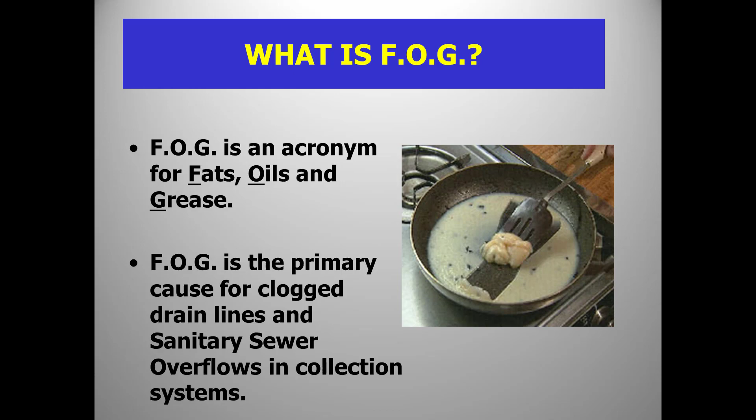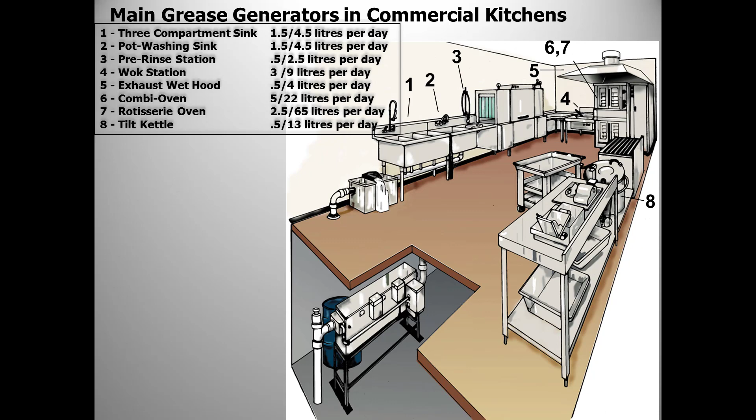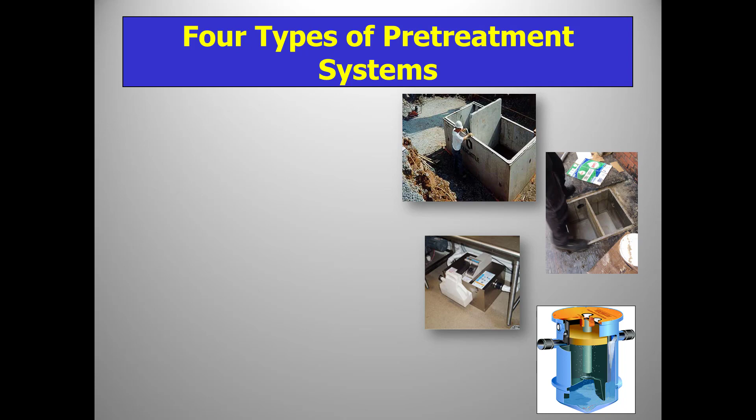So there are 4 different types of pre-treatment systems. The first one is the large precast concrete grease traps.

As you can see, they are basically just large tanks with certain baffles in them.

Then we have the complete opposite: the small hand scooped type grease traps. These tend to be somewhere in the region of 200 litre total liquid volume, but they fill up with grease very quickly and are very seldom maintained properly.

And then there's the grease recovery unit, the GRU, or the automatic grease trap.

And then finally we have the super capacity low volume passive type grease trap, although a TrapZilla in this case is actually a HydroMechanical grease trap. I will come back to this HydroMechanical grease trap later and explain that. But for now, basically a HydroMechanical grease trap, like an automatic grease trap, is a grease trap that's sized by its flow rate rather than the number of meals per day or the size of the pipe feeding it. Like I said, I will revert back to that later on.

So that's the different types of grease traps that are normally around.

In this slide I'm demonstrating your typical conventional grease trap. At the very bottom of the tank you can see sediment build up, or sludge build up. Just below the inlet and outlet level you can see the static level of water in the grease trap, and just below that static level you can see the grease layer, or grease mat.

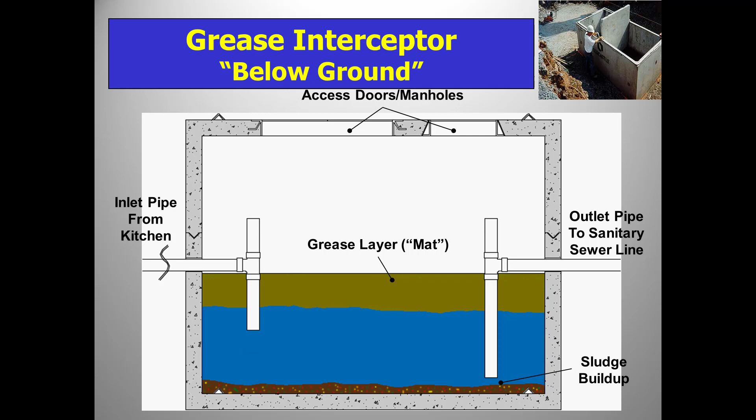You have to be mindful that with the typical conventional grease trap, the sludge and grease mat must never pass 25% of the total capacity of fats, oils and grease in the trap, because once it passes 25%, the efficiency of the conventional passive grease trap starts to degrade seriously. So really, it's only capable of handling approximately 25% of its total liquid volume. Any questions, come back to me.

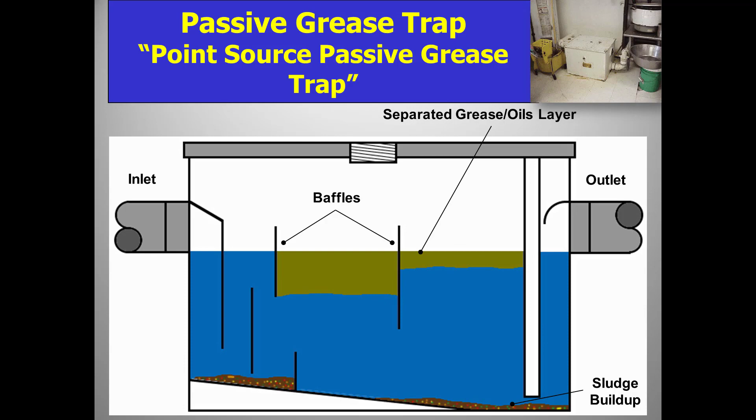This is the small passive type grease trap. You can see in the top right corner a photograph of this type of grease trap. It's a point source passive grease trap with a few different baffles inside it. The main baffle in this case is the one on the outlet side, and there are other baffles inside just for dividing up the flow. But again, it fills up very quickly with grease.

This is the inside of the automatic grease trap. As you can see, it has an internal strainer basket, then a mechanical mechanism for removing the grease. In this particular case, it's a wheel controlled by a timer. Invariably the timer would be set to operate in the middle of the night, somewhere in the region of 3 to 4 a.m.

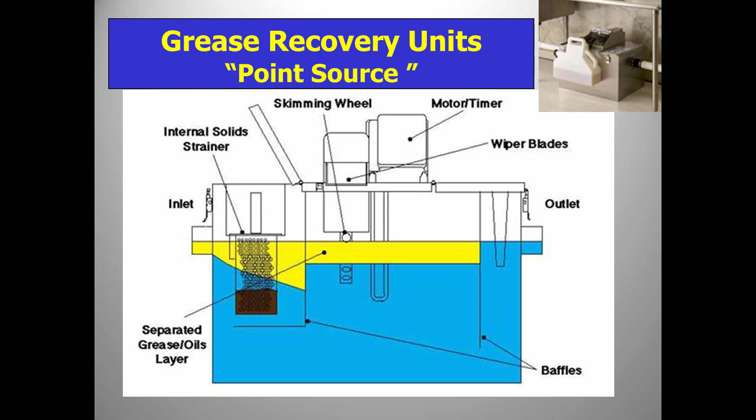Normally the preferred time would be when the kitchen is not in use. So when it comes on, it removes the trapped grease sitting on top of the invert levels of the grease trap, and generally removes about 90% of what it has trapped, leaving the retention tank ready for the next day's production when the kitchen staff come in. So that's basically grease recovery units.

Like I said, the most important thing is that the point source grease trap is the biggest area where automatic grease traps are used. The sizing of the automatic grease traps is all done based on the flow rates. Some of these slides are going to be totally self-explanatory.

So you just have a look at that, pause it and look at it. Again, any questions, just come back to me.

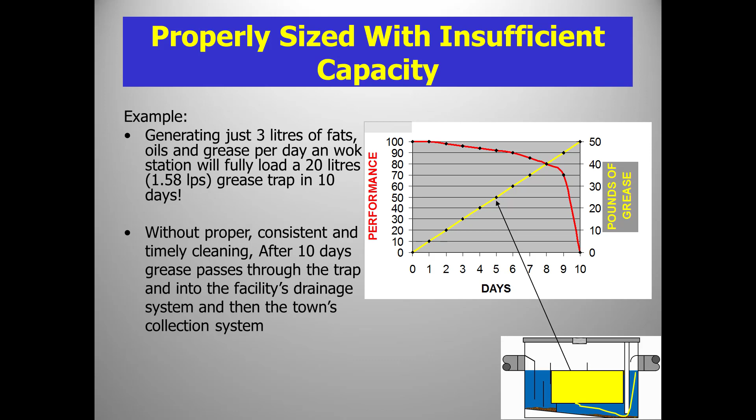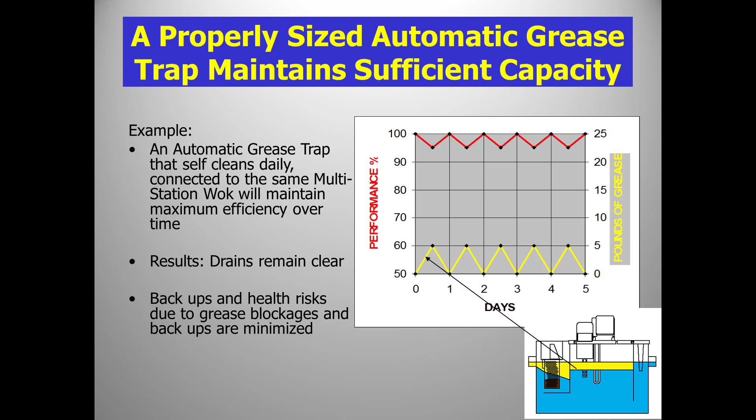Properly sized with capacity - this slide is trying to demonstrate how the retention area in an automatic grease trap is constantly filling up, and then is also being automatically rejuvenated, brought back to an empty, or almost empty, retention tank. You can see in the bottom right side where it's demonstrating that the grease mat is being constantly maintained.

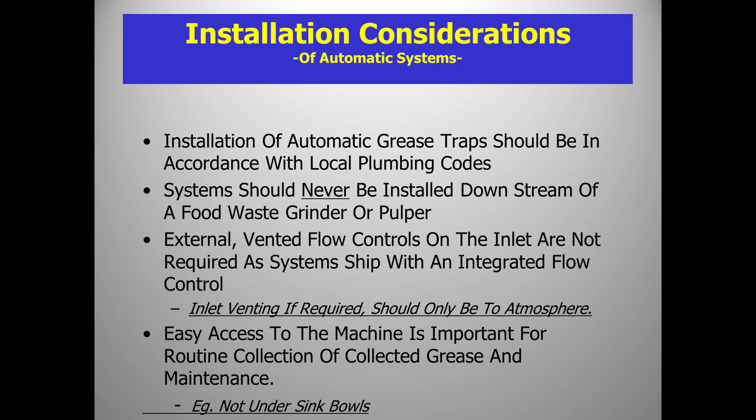Again, all of the installation considerations have to be considered for the different types of systems in that. Again, self-explanatory.

Automatic grease traps, the majority of which are the Big Dipper type, have anti-siphon devices built in. But it's always worth it for an engineer or specifier to specify that units have proper venting, because if a trap isn't properly vented, it can cause what's known as siphoning.

When siphoning occurs, during the hydraulic event of the grease trap draining, the hydraulic pressure on the outlet pipe can cause all of the water to be literally sucked out of the grease trap. Sometimes this is a major problem, as the trap ends up totally empty, which is not good, and it also sucks out the sludge and grease.

Regarding maintenance, automatic grease traps tend to be like spoiled children, in that they need 2 minutes of attention every day and 10 minutes once a week. If they don't get it, they tend to kick up blue murder, so it's really important that the maintenance program is adhered to.

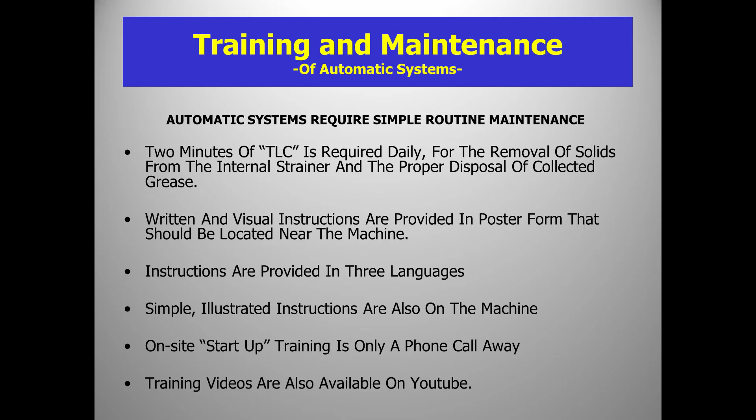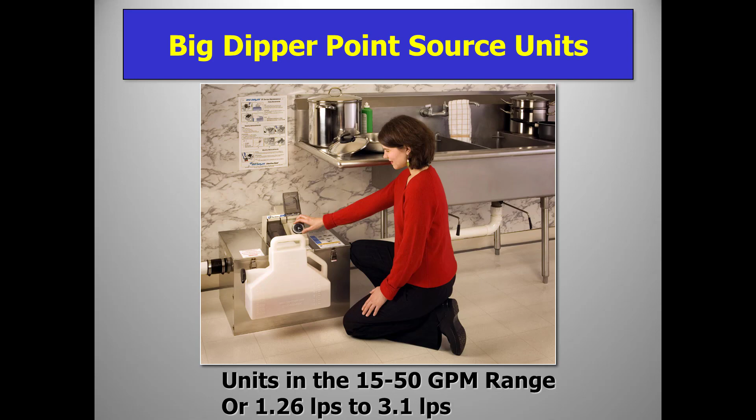The flow rates with our Big Dipper units tend to range from 1.26 litres per second up to 3 litres per second. That's typical for commercial kitchens. We do have bigger units, but come back to me if you have any questions on those.

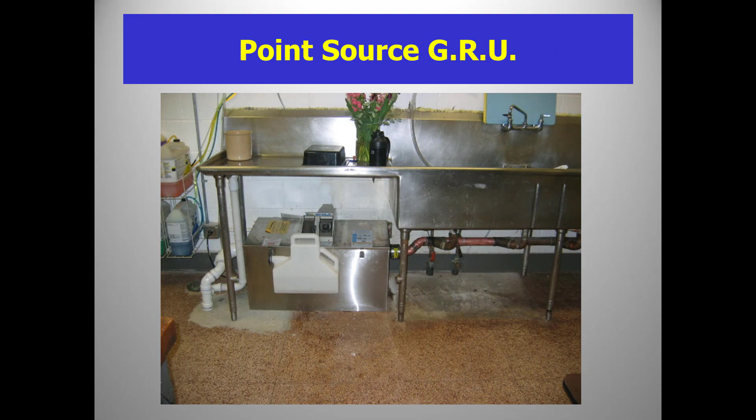These are just self-explanatory. Now, understanding kitchen flows.

This is your typical fast food type restaurant. With fast food, you tend to have a 3-tub sink, which is 90+% of the kitchen's total fats, oils and grease, and then there's another breakdown for the mop sink and floor drains. They tend not to have dishwashers.

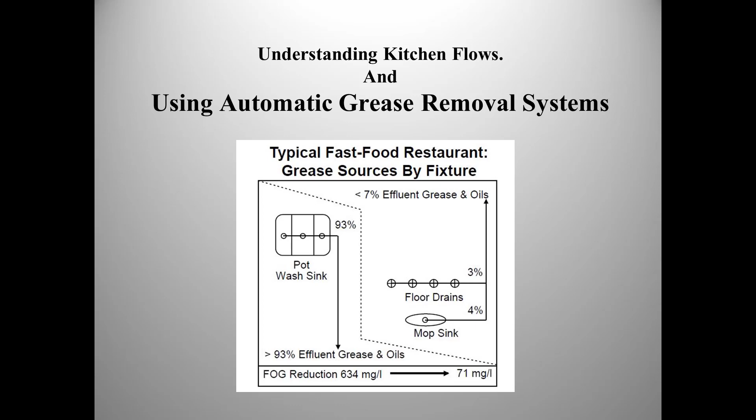Typical full service restaurant: you have a pot wash sink, generally responsible for 75% of the kitchen's fats, oils and grease. Pre-rinse sink is 15%, dishwasher 4%, and so on.

But the most important thing I want to get across with this slide is that when you have a dishwasher and a pre-rinse sink, it is not necessary to have the dishwasher drain into the automatic grease trap if the dishes are pre-rinsed before they go into the dishwasher.

The main reason is that if you allow a dishwasher to drain into an automatic unit that's already trapping the effluent discharge from the pot wash sink and pre-rinse sink, where grease is sitting in there, the dishwasher discharge comes in at anywhere between 60 and 80 degrees Celsius, plus it has a very high detergent content. When that comes in and mixes with the grease already trapped in the retention tank and swirls around, it literally robs the grease that the grease trap has already trapped and takes it down the drain.

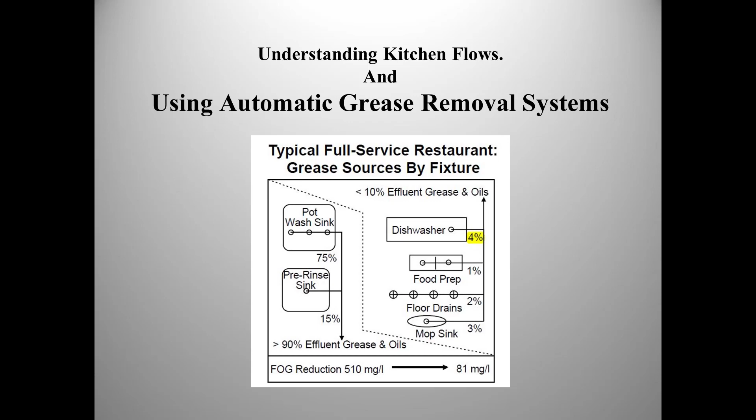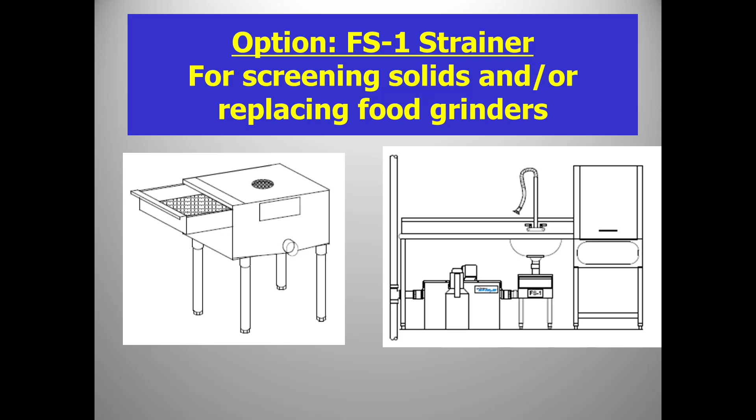The Achilles heel to any grease trap, no matter who manufactures it, is food solids. I would always encourage engineers and specifiers to specify as much trapping of food solids as possible. In this slide here, it's just one type of strainer, so it's just a system for trapping food solids. There are many out there on the market, but this is just one. Anyway, do your best to trap as much food solids as possible.

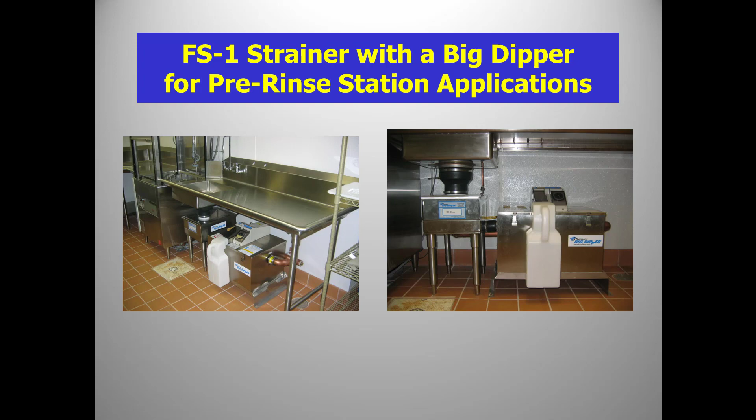And this is just a couple of photographs here showing different setups of food solids.

Okay, so moving to the central units, i.e. the big dippers that go down in basements. One particular site that comes to mind is Terminal 2 in Dublin Airport. It has 4 units like this that are underneath the food courts. Although all the food courts have their own grease trapping solutions, this is just something that the airport authority decided they wanted to have in there as a backup to what was going on in the food courts. They have 4 of them, 2 on air side and 2 on land side.

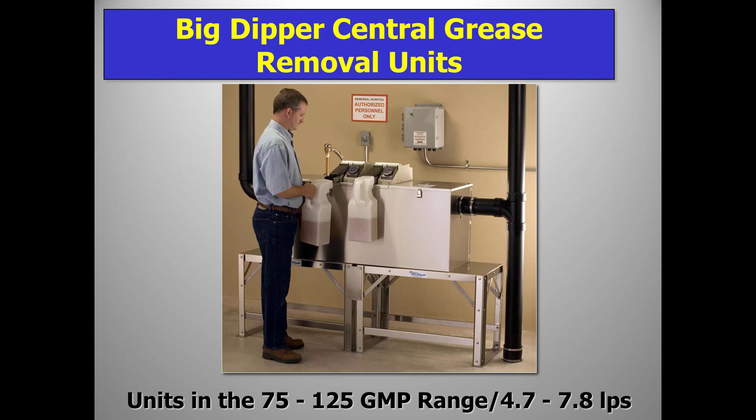When you put an automatic grease trap in a remote location, i.e. a location that's away from the kitchen, that's out of sight and out of mind, you need to have a system in place that can deal with any food solids that come down to it automatically, if possible.

So in this particular case, we have a Big Dipper AST, which stands for Automatic Solids Transfer. Basically what happens with this unit is it traps the grease in the first chamber on the left hand side of the slide, and every 2 hours a timer activates and opens up a solids transfer system, which basically sucks out the solids of the first chamber and takes it past the grease trap and directly down the drain.

Because you cannot depend on staff, no matter how much they promise you, it will not happen, to come down and empty a strainer basket. They will not do it. When it's out of sight, it's totally out of mind. So again, any questions on this, come back to me.

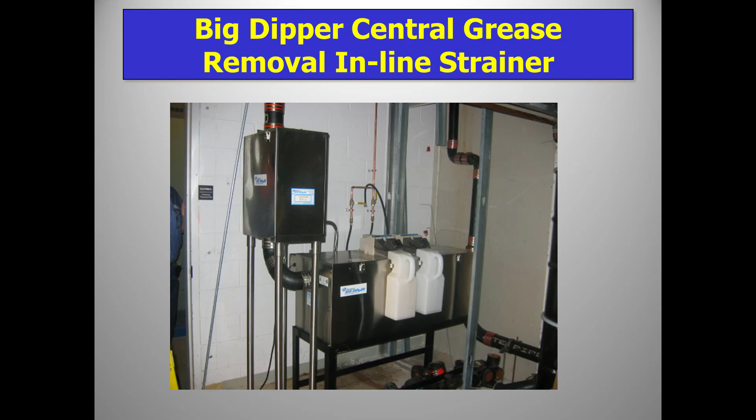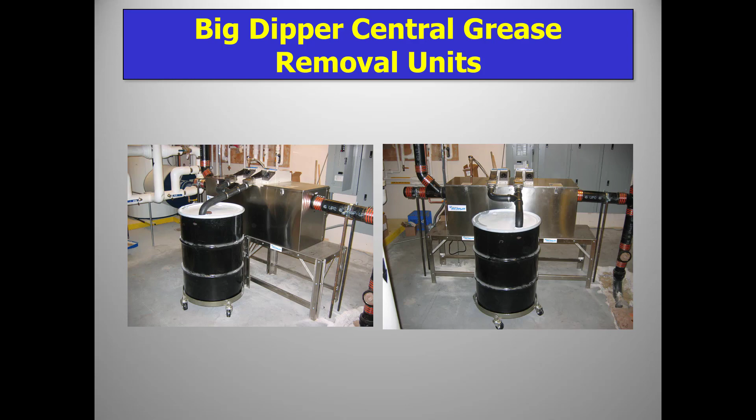This is another central unit, and it has a solids trapping system in there. When you put large units down in basements, it's really best that you put large 200 plus litre grease collectors onto the systems for the collected grease, because you cannot depend on kitchen staff to come down and empty the small 7 litre containers on a daily basis. There are just so many different scenarios, or types of installations, that you can build up.

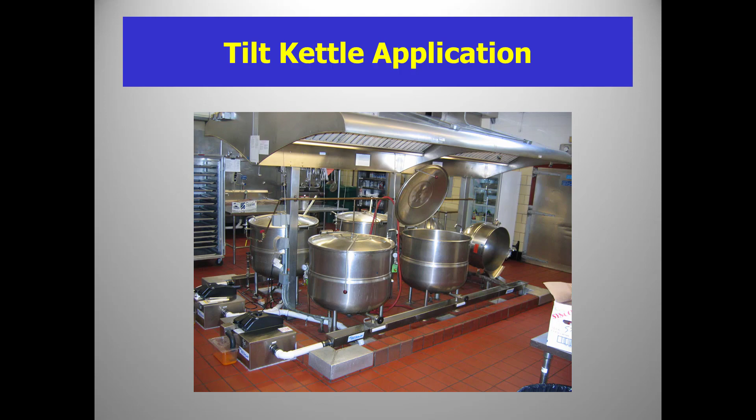Alright, with this system here, it was not possible to put in a grease trap in the basement, so with these tilt kettles here, we put in this trough system to drain into small automatic grease traps, and that's just what's happening here.

That is the calculation required by many local authorities. You can note it down and put it into an Excel spreadsheet if you wanted to calculate, but at the end of the day you need to come up with an answer in litres per second. So that 0.49 litres per second, you just add the different units to it and come out with your total flow rate.

In this particular sink, you can see it has the measurements on the left hand side. So if all else fails, just contact us, number below or email.

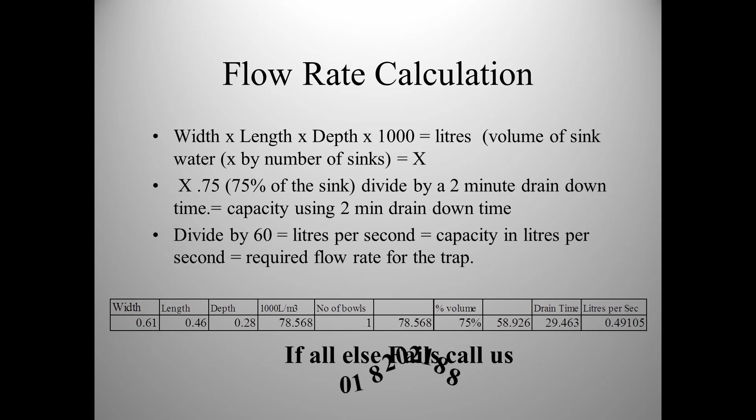Okay, I'm going to move on to the TrapZilla, which is a super capacity, low volume, passive type grease trap. I say passive in that it's a below ground grease trap, but it's actually a HydroMechanical grease trap, sized on flow rate as opposed to the old fashioned number of meals per day. So these are some of the different volumes or different models.

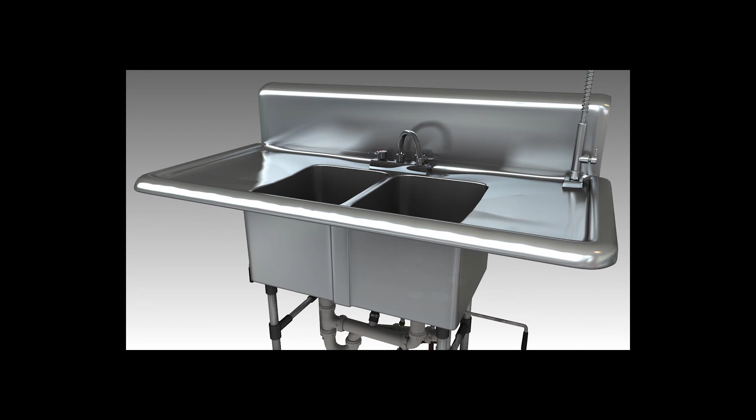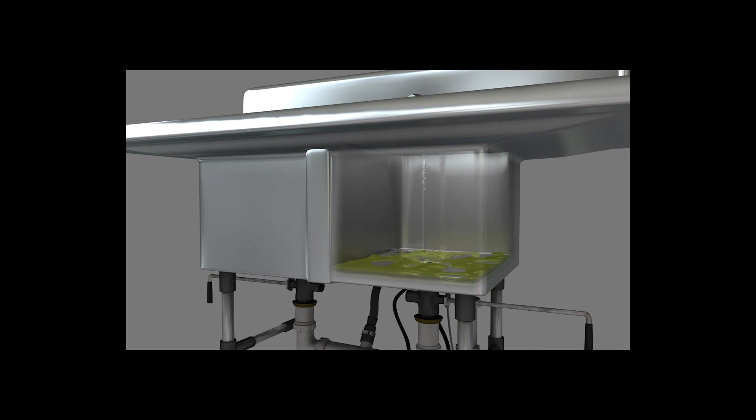Thermaco's TrapZilla Grease Interceptor efficiently treats fats, oils, and grease from kitchen wastewater. Kitchen flows associated with grease often come in two forms. Low flow discharge from a pre-rinse or unstopped sink, where flow rates rarely exceed 5 gallons per minute, and impounded flows, where sinks are filled and then dumped all at once, resulting in much higher flow rates. Low flow discharge is never a problem for grease interceptors, as fats, oils, and grease separate easily at these flow rates. Impounded water flows, despite their higher flow rates, are already stratified, with most of the grease floating on top of the water. With an impounded source, once a flow event begins, the stratified contents of the sink begin to drain, with the water leaving first.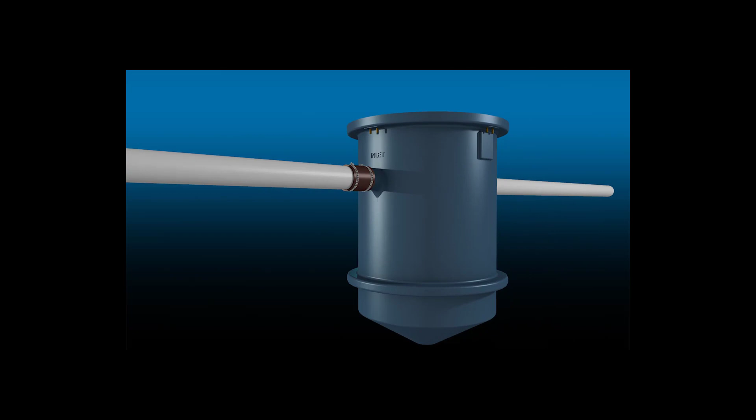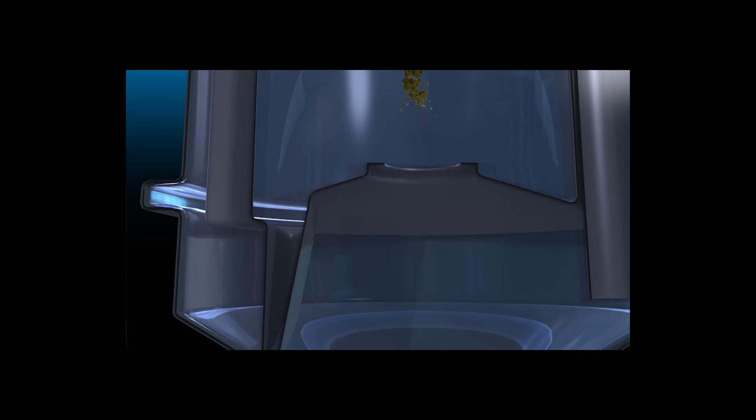Any grease residue from the previous flow event enters TrapZilla and separates, floating up past the horizontal baffle and into the grease retention area. The free-floating grease is the last thing to leave the sink. It enters TrapZilla, floating up past the horizontal baffle and into the grease retention area, where it remains until the interceptor is pumped. The vertical baffle breaks the flow of water into the unit, disrupting its path and preventing water from jet streaming out of the unit. TrapZilla's horizontal baffle prevents this water from interacting with the grease mat, retaining all previously separated grease.

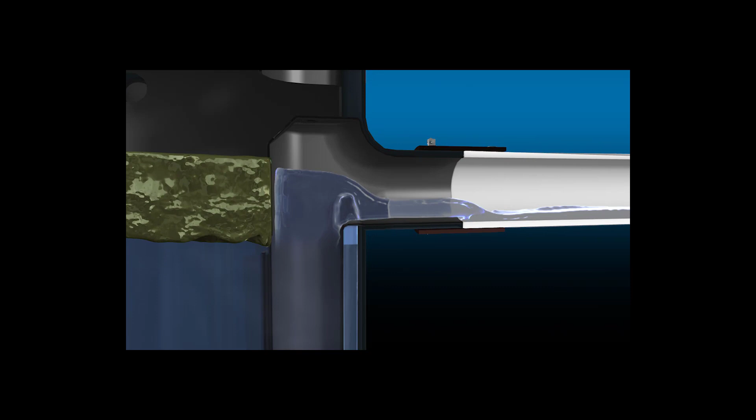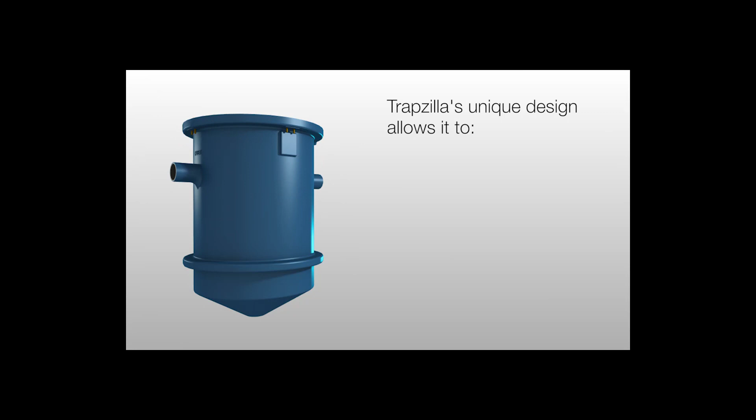As water and grease flow into the interceptor, the liquid level in the main tank rises. Once the liquid level rises sufficiently, clean water from the bottom of the tank exits through the outlet pipe. As the incoming flow slows to a stop, a small grease residue is left in the inlet of the unit. Here it will stay until another flow event, and the cycle will repeat. TrapZilla's unique design allows it to hold large amounts of grease in a compact footprint, retain previously separated grease, and efficiently separate new greasy kitchen effluent, regardless of flow type. The TrapZilla Grease Interceptor, a Thermaco technology.

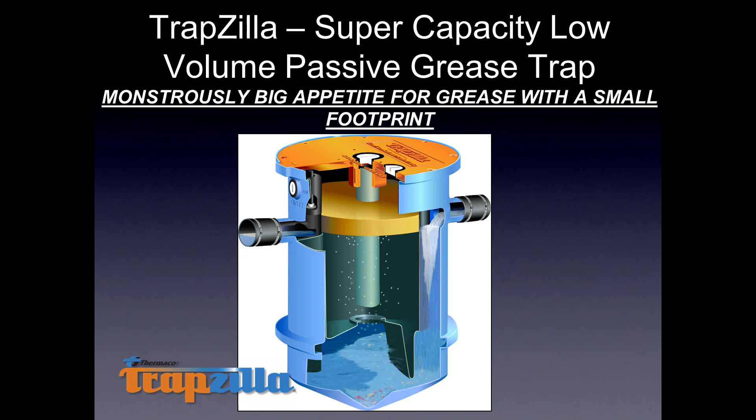This is the TrapZilla Model TZ600, with a capacity of holding approximately 600 pounds of grease, about 270 kilos of fats, oils and grease. It can hold 80 to 90% of its total liquid capacity in volume of fats, oils and grease, as opposed to the 25% that a conventional passive type grease trap can hold. So there's a huge saving for the customer, because when they have this unit pumped out, they're pumping out mostly fats, oils and grease.

Whereas, let's say for example if it's a 1500 litre grease trap, this unit here can basically do the same job, if not a better job, than a 1500 litre conventional grease trap, with a very small footprint. As I've said before, it's much like the TARDIS, in that it is tiny on the outside but huge on the inside. The footprint this unit takes up is really very small, yet it will actually trap more grease than a 1500 litre grease trap, and the total volume on this grease trap is only 360 litres. So a 360 litre grease trap is going to do a better job than a conventional 1500 litre grease trap. Huge saving for customers on their pump outs, as they're now required to have pump outs done on a regular basis, at very least every quarter, every 3 months.

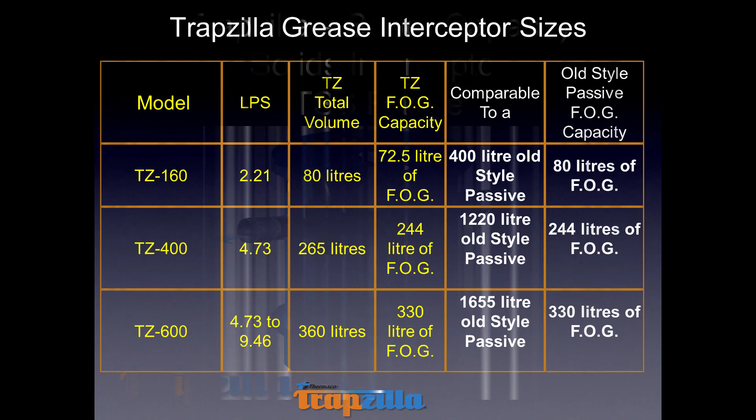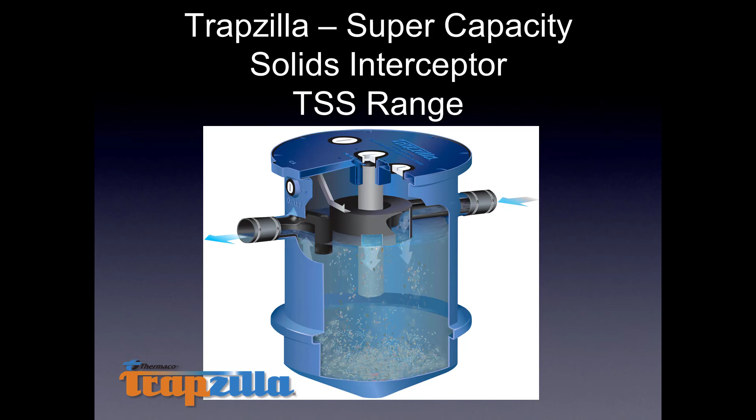This is the TrapZilla Solids Interceptor. Again, it's the very same size as the TZ600, but as I've said before, food solids are an Achilles heel to every type of grease trap out there. So whenever possible, you need to specify that the customer deals with the food solids. And that's basically what this is, a food solids separator.

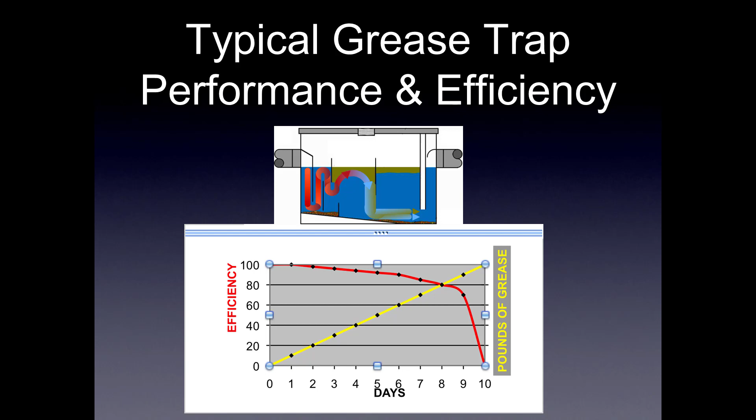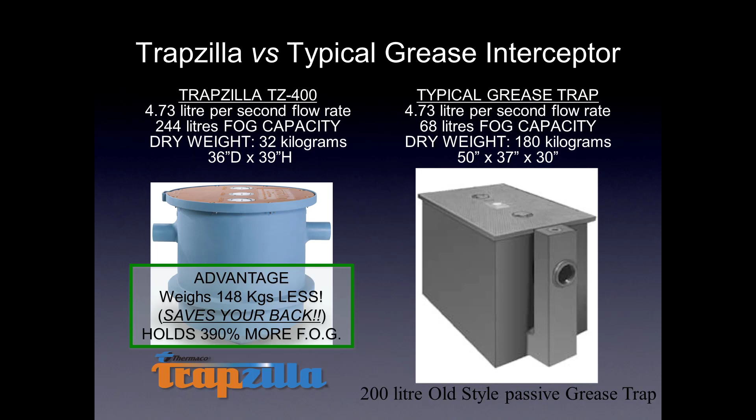Dell Ireland contacted us as they had a problem with their conventional below ground 1500 litre steel in-ground grease trap. The steel was rotten and it was causing the trap to leak into the ground around the grease trap, causing many problems.

Basically, we went at the inside of it with an angle grinder, tore out all the old baffles and put in a TrapZilla TZ 600. The TrapZilla TZ 600 has a capacity of approximately 330 litres, and it will actually trap more grease than the 1500 litre grease trap that it is replacing. Dell Ireland have been very happy with this installation.

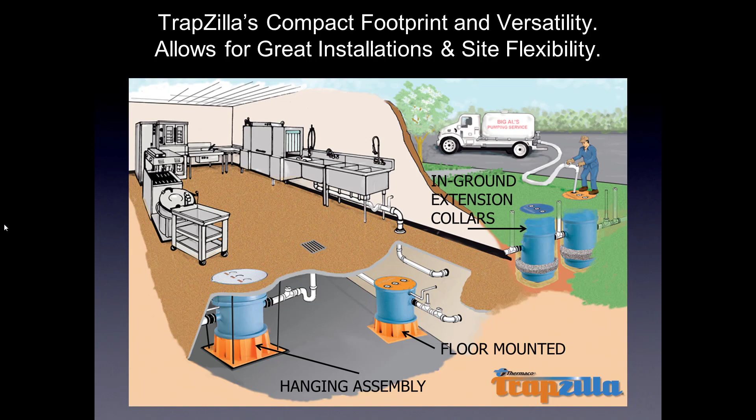Okay, basically with this slide it's self-explanatory. It's just the different types of installations: suspended from the ceiling, on the floor of a basement, or outside and below ground. Again, with all these installations it's so important to make sure that the traps are vented properly and there's plenty of cleaning eyes put in.

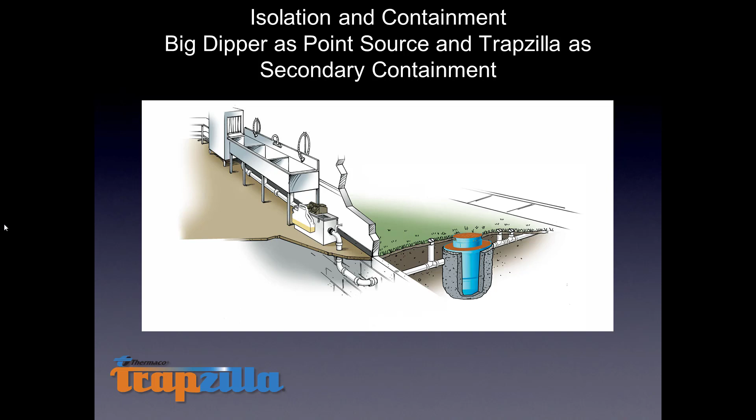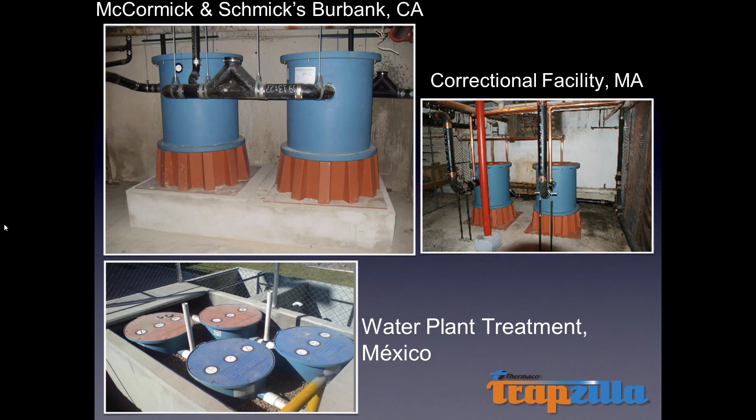In this particular case the TrapZilla is going in as a backup to the automatic grease trap that's inside the kitchen. Again, in these slides here it's just some samples of our installations.

With this slide here, when the TrapZilla was originally installed, it was not fitted with a vessel vent, and the staff in the laundry room here were complaining about odour coming from it. So again, I just need to emphasize the importance of venting properly, and if there's any queries at all, just contact me and I will talk you through the different venting that's required.

You can see here we have solids interceptors in front of the TrapZillas. With these TrapZilla arrays, as I call them, you can put in as many as you like, you can just keep adding. The largest one I know is in Fort Bragg in North Carolina. It has 2 solids interceptors and 10 TrapZillas after it.

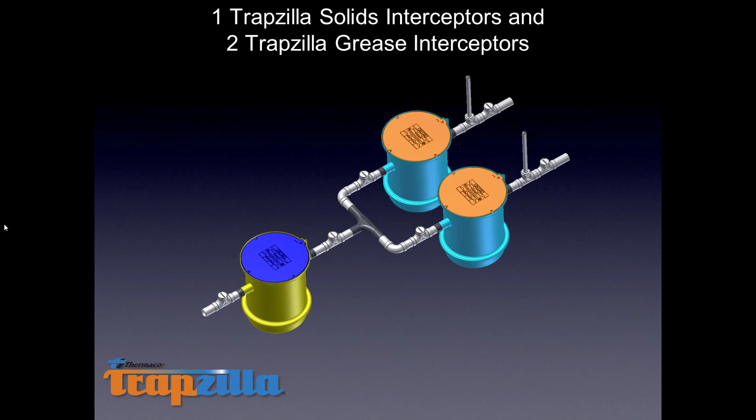They were originally instructed by the local authority to put in a conventional below ground grease trap that was similar in size to an Olympic sized swimming pool. Seriously, and they were allowed to put in the 10 TrapZillas instead, which saved them a fortune. Anyhow, again, these are just different types of installations. I'd like to draw your attention to the cleaning eyes and the venting that's in here in these.

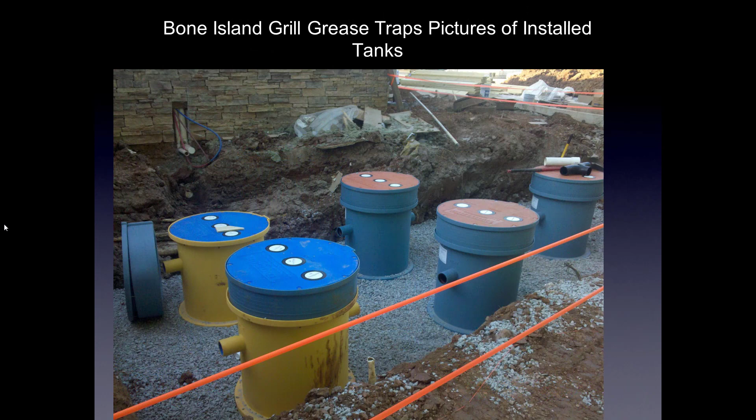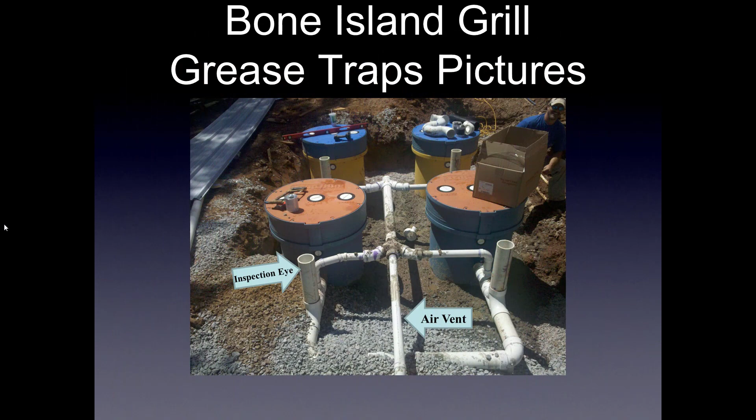The TrapZilla is made of polyethylene, and in the majority of cases it will outlast the building that it's going into. Here in this particular case, it was a 1,000 litre grease trap, and we put in the TrapZilla TZ 600 model.

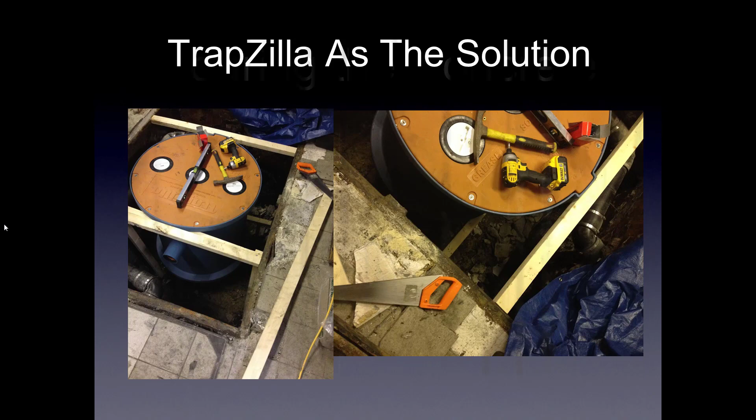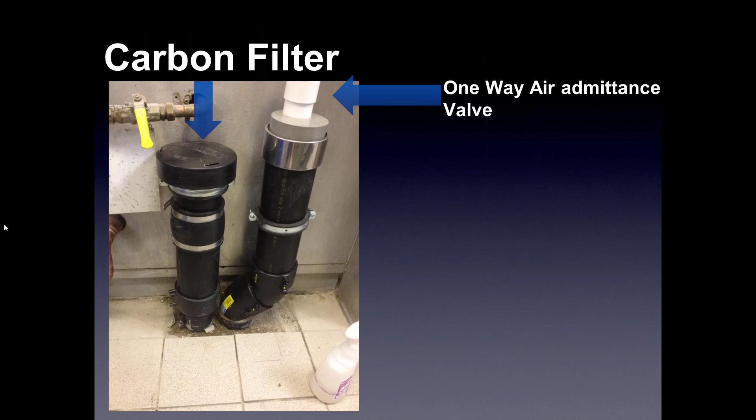Again, here in this slide, we're showing that the TrapZilla has two vents. One is the hydraulic vent, air admittance valve, that goes on the outlet, and on the left hand side you can see the carbon filter, which is the vessel vent, and this allows the unit to breathe. If the vessel vent is not fitted, then the TrapZilla will breathe through very small perforated holes on the lid. It will have to breathe as water goes up and down, a bit like a cylinder in a piston engine. As it goes up and down, it needs to move air. This was the first pump out that took place of this grease trap one month after installation.

Thermaco dates back to 1983, and we got involved in grease separators in 1985. In many cities, downtown areas, they had no room for the conventional type large concrete or metal grease traps to go, and they wanted more capacity. And that's when we brought out the TrapZilla.

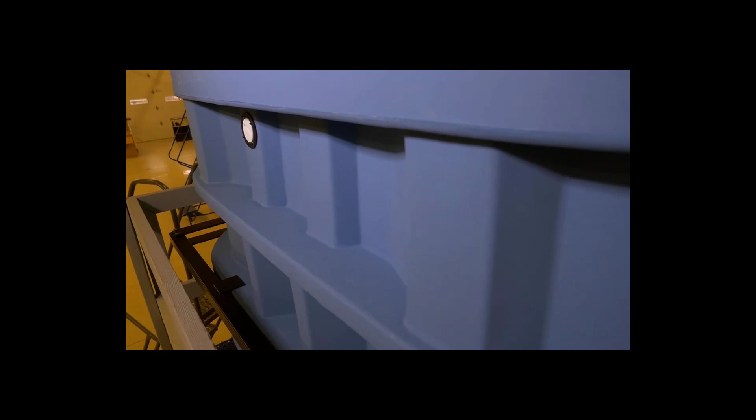Since 2006, we have been perfecting the TrapZilla design. Today's unit that's being evaluated is the pinnacle. We refer to this as our 3rd generation TrapZilla design. It uses the hallmarks of the horizontal baffle, with a number of subtle treatments on the inlet and outlet baffle, and the overall tank design has been optimized to enhance separation and to have as much grease retention in as small a footprint as possible.

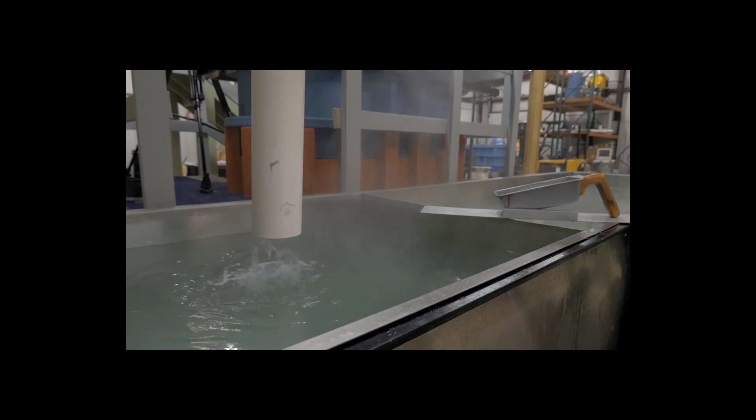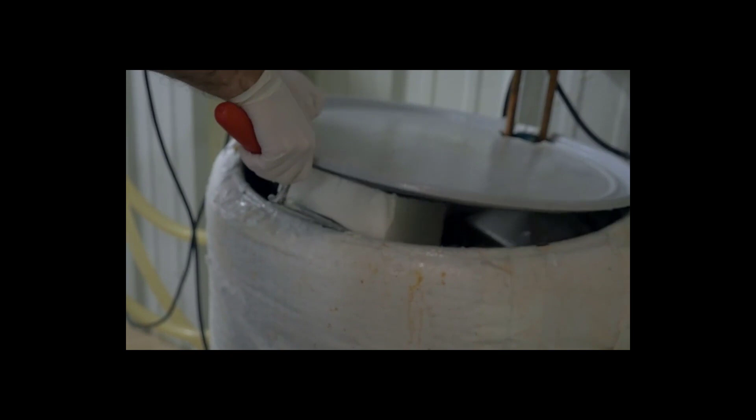Today's test is a rather strenuous test in that it's 100 gallons per minute, using 160-degree hot water, and 20 pounds of grease, lard, at a time being administered in 200 gallons of water, batch after batch. This is far more strenuous than would be seen in any restaurant.

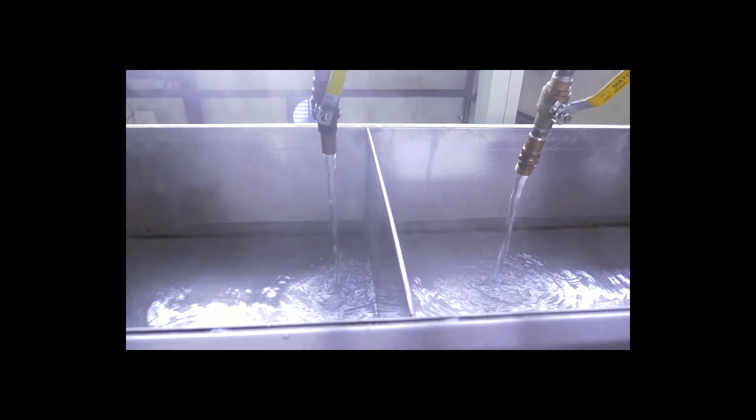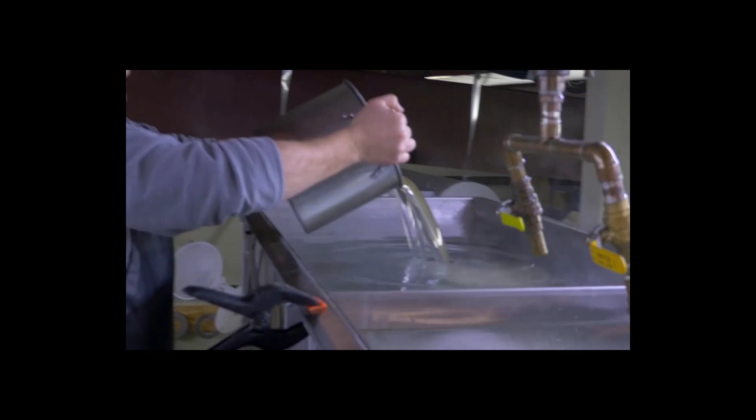Here are 2 stainless steel sinks, and they each hold 100 gallons of fluid. We will fill them up with water at 150 to 160 degrees F. After the water fills up the sink, we will also add lard. The lard is also preheated to the same 150 to 160 degrees F as the water, and because the sink partition is in here, we will add 10 pounds of grease here, 10 pounds of greased lard over here, and drop them in over about a 2-minute period of time.

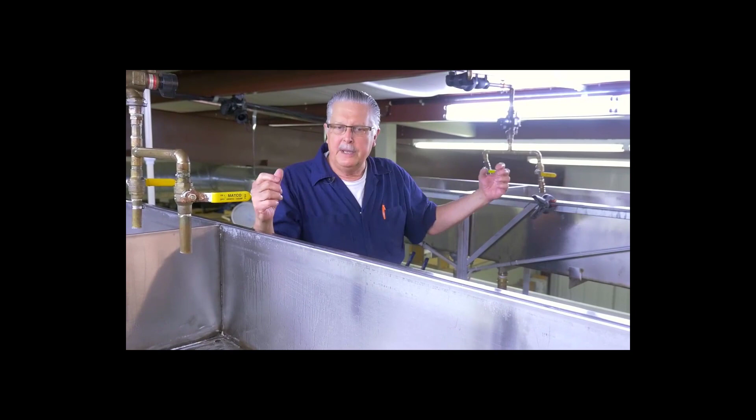Total of 200 gallons, dropping in 2 minutes time gives us 100 gallons a minute, and that's the flow rate for the unit we're evaluating. During the test, all the water and some small amount of grease passes through the unit and goes into the skim tank. In order to determine what is retained in the unit, we have to determine what is not retained in the unit, and that's where skimming comes into play.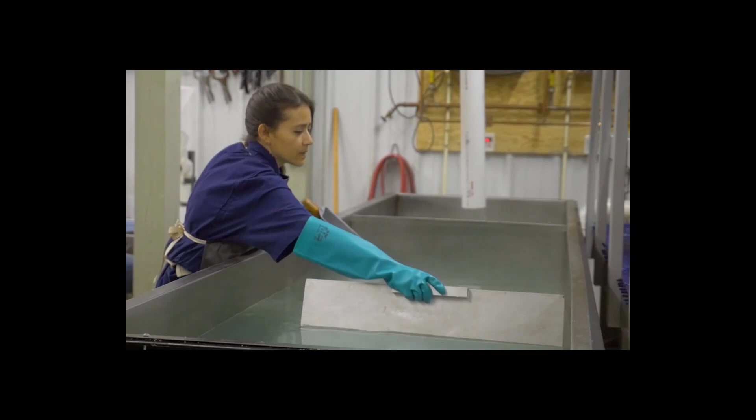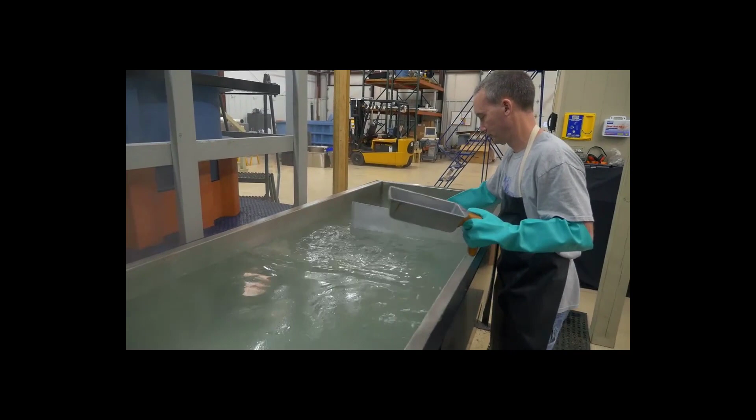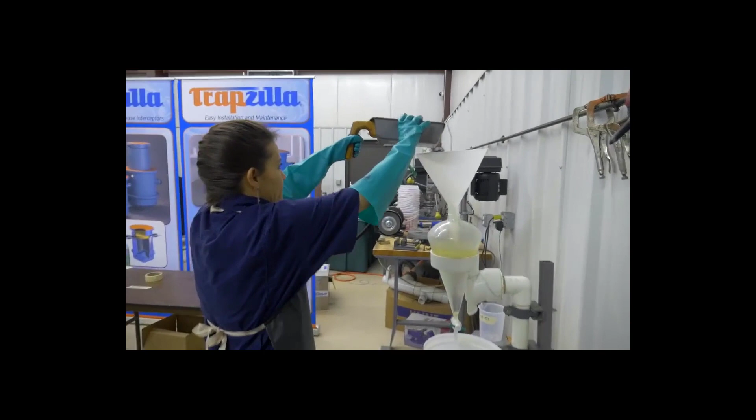The lower specific gravity grease rises to the top of the skim tank, and we use a long blade to corral any grease that has risen to the top over to a corner. We use a small pan to remove that material from one end of the tank. Pour that material into a separatory funnel where it further separates. We'll get a little bit more water out of it there, and then we pour it into a beaker and

weigh it. And that gives us a weight for each drop cycle, a weight of the amount of the grease that goes through the unit. That gives us what it didn't hold, and we know what we put in to begin with, so the difference of those two gives you the amount of material that's held inside of the unit.

Now the weather. We're expecting an enormous amount of snow tonight.

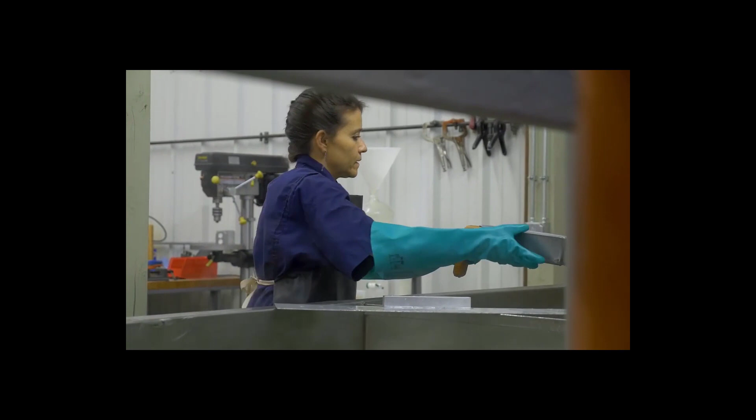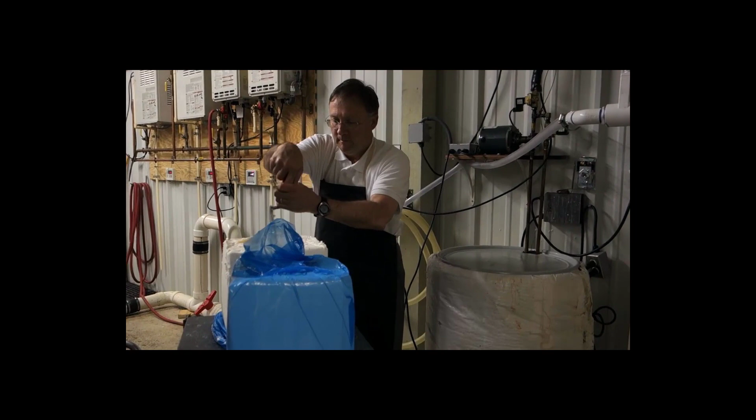We found out there was a winter storm rolling in on Wednesday evening, and we thought about the safety and the ability of our employees to get in. Because of that, we decided to start testing early on Tuesday evening. I plan to be in the building, staying here, finishing the test, and have no idea if I'm going to get home tomorrow night because the roads may be totally impassable in our town.

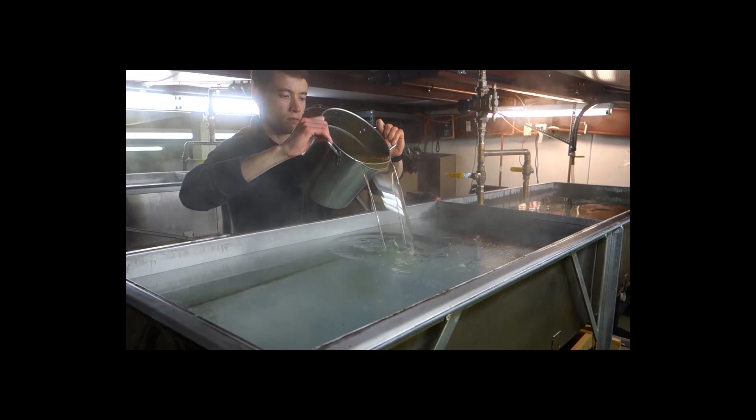We've determined that the TrapZilla model we're testing has passed the theoretical limit of a 750-gallon Interceptor, which is 1,381 pounds of grease retained. We did it. I think with that last drop, number 76 in this case, we have passed the 1,500-pound mark. Pretty awesome accomplishment.

Right now at the conditions on Highway 64 between Asheboro and Lexington, you can see a good amount of snow cover on the ground right now in this area. Check on the outside and see how the snow's doing.

We just had drop 92. About 6:35 in the morning. We've been going for almost 40 hours straight of testing. 92 successful drops. 92 flat separation curve drops. That's right. Averaging what, 99? 99.3% cumulative efficiency. I'd say this today was a huge success, completely exceeding our expectations. It did.

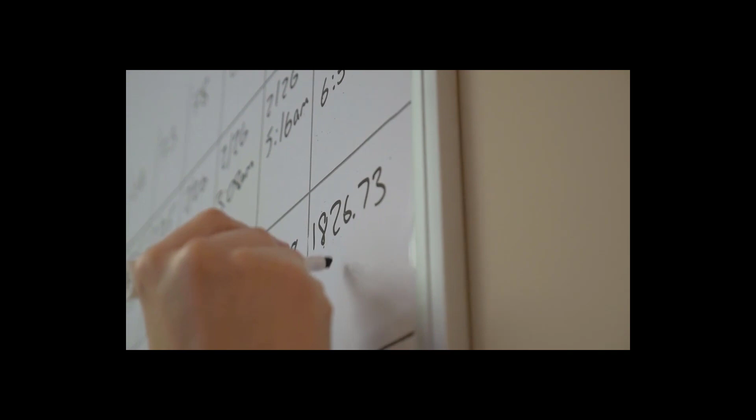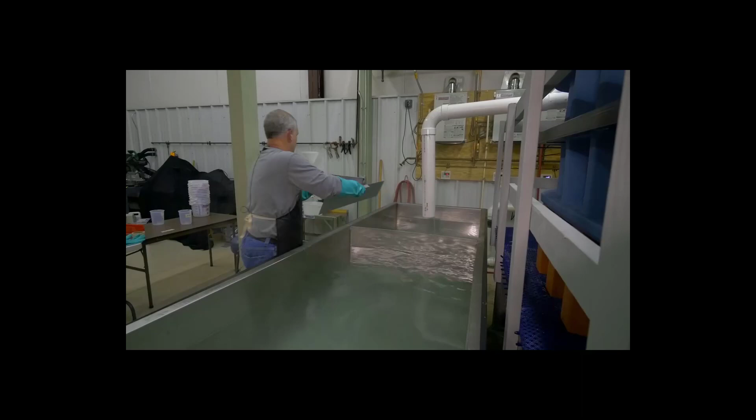The unit ultimately held 1,826 pounds of grease, which was well beyond my expectations, well beyond everybody's expectations. It's great having a unit that over-delivers and gives people in a 250-gallon capacity, literally the equivalent of a 1,000-gallon concrete grease interceptor. We were very proud of what we ended up with.

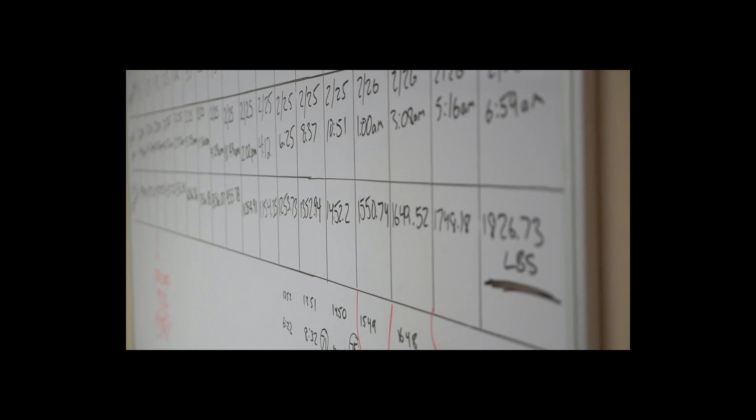One of the goals here at Thermaco is to exceed our customers' expectations. We have a product that stores multiple times the industry standard minimum requirement, 9 times the standard, plus has efficiencies up close to just below 100%. And really, it doesn't get much better than that.

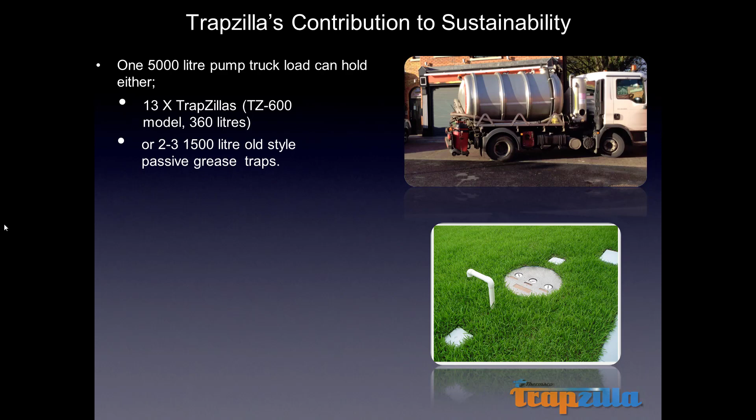Basically, what we're showing here is this particular truck is a 5,000 litre pumping truck, and with this we can pump out 13 TZ 600 TrapZillas, which is an equivalent to 2, maybe 3 1,500 litre grease traps. What I'm demonstrating here is the efficiency of it and the carbon footprint that's involved. A lot of premises would be concerned with this, and so it's a huge saving to recommend the TrapZilla system.